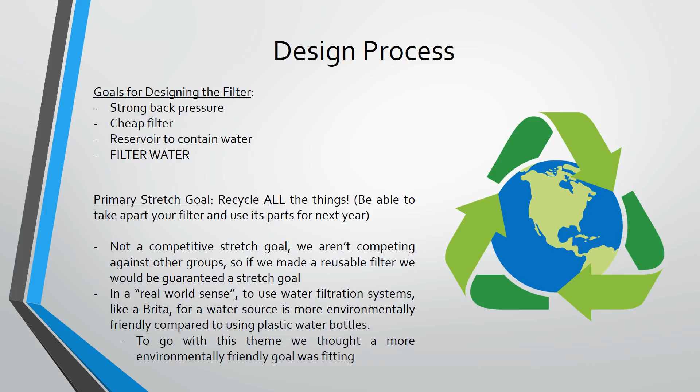For our first design iteration, we chose to have small sections of charcoal separated by cotton and cheesecloth. This allowed us to use less charcoal for the filter, which would keep the cost lower. The first iteration also included a piece of filter paper as the very last medium for the water to pass through before it exited the filter.

We had hoped this would increase the dye removal, and it did. However, the paper brought our filter to a grinding halt. There wasn't enough pressure to force the water through the paper, so our flow rate suffered significantly.

In our final design, we made a few changes, the first of which was the removal of that filter paper. Ultimately, we decided that the difference it would have made in dye removal wasn't worth the losses we were seeing in the flow rate.

Another big change we made from our first design iteration to our second design iteration was the addition of more charcoal in larger sections. Since it was the charcoal doing most of the heavy filtration, it only made sense to add more of it, and making the sections larger reduced the amount of cheesecloth and cotton balls necessary for the filter.

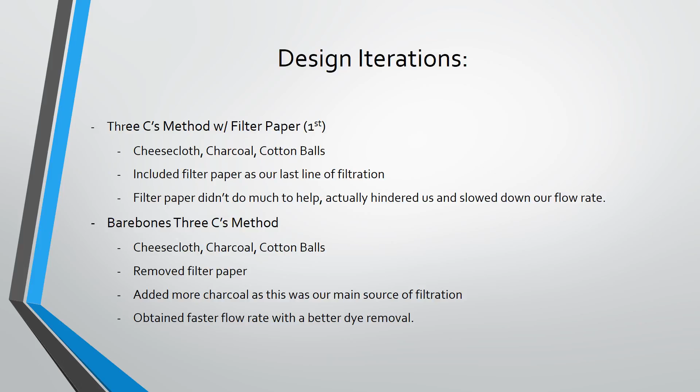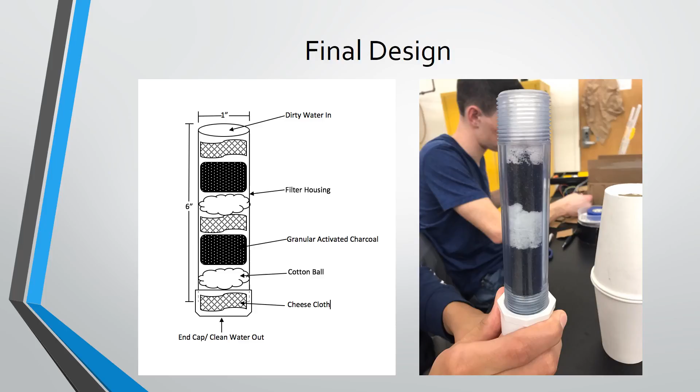When we tested our filter, we were able to remove about 43% of the dye. This wasn't quite as much as we had hoped to remove, but the addition of extra dye and the wear of the carbon late in the project was unavoidable.

We were also able to filter 10 milliliters in somewhere under 2 minutes. Again, we were happy with this result as it was well within the allotted time frame. The total cost of our filter was less than $150, which we felt was reasonable for a commercial filtration system.

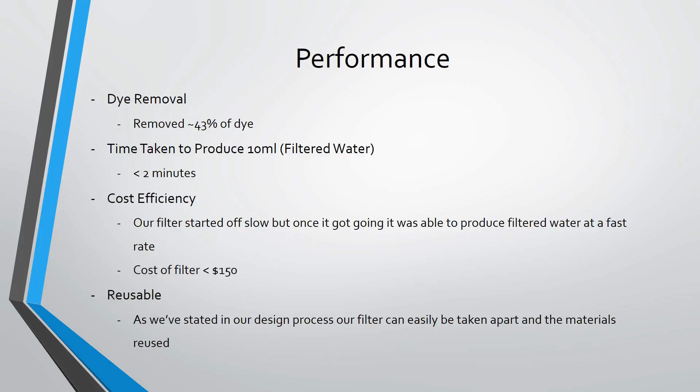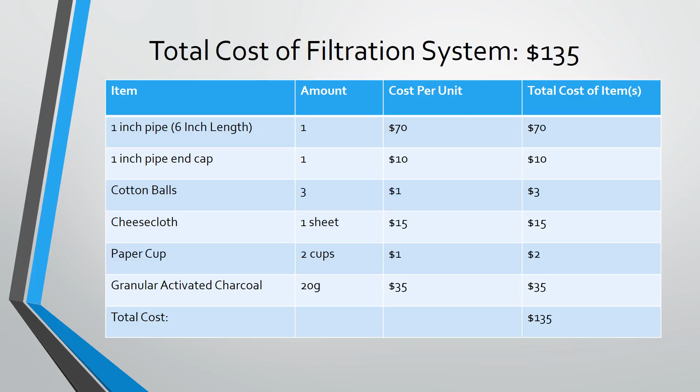While we were happy with our filter, there is always room for improvement. The first improvement we would have liked to make would have been the use of a larger filter housing. By increasing the diameter of the housing from just 1 inch to 2 inches, we would have been able to quadruple our filter size. This would allow for more charcoal and better filter performance. However, it would have had a major impact on cost.

Another improvement that could be made would be the addition of a water reservoir. The ability to store more water for the filter increases its user friendliness and would also provide pressure to force the water through the filter faster, improving our flow rate.

In addition to these, significant improvements could be made to the filter stand as well. A more robust stand would allow stability for a water reservoir, as well as the peace of mind that your filter isn't going anywhere.